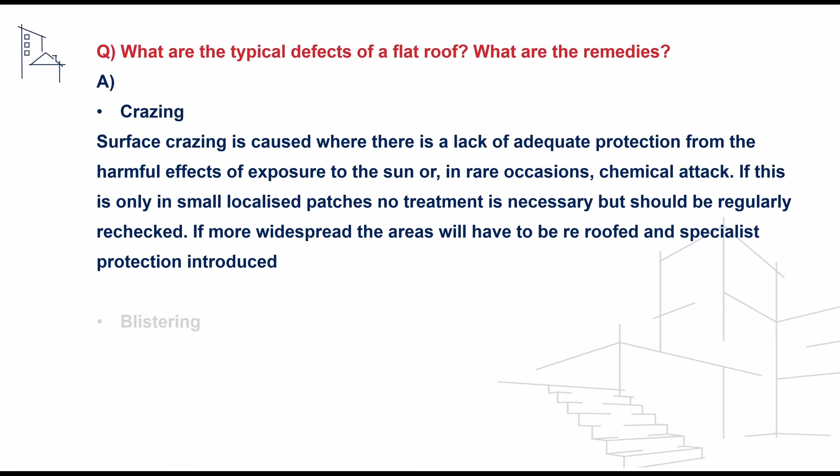To address this question, first of all we can mention a typical defect with a flat roof is crazing. Surface crazing is caused where there is a lack of adequate protection from the harmful effects of exposure to the sun, or in rare conditions a chemical attack. If this is only in a small localized patch, then no treatment is necessary but should be regularly rechecked. However, if it's more widespread, the areas will have to be re-roofed and specialist protection introduced.

Another question we may be asked is: what other sorts of cracks would you expect to see on a brick building and what may have caused them?

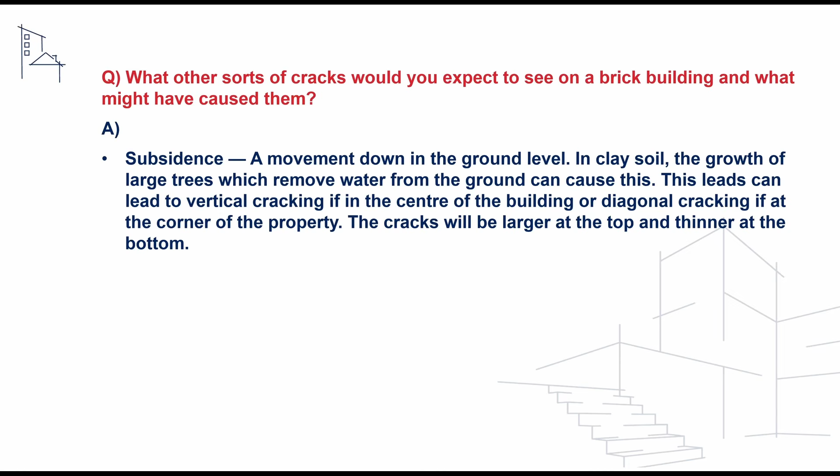To address this, first of all we could reference subsidence, and this is a movement down in the ground level. This can occur in clay soil where the growth of large trees which remove water from the ground can cause this, and this can lead to vertical cracking if in the centre of a building or diagonal cracking if at the corner of a property, and the cracks will be larger at the top and thinner at the bottom.

We could also reference ground heave, which is an upward movement in the ground level. In clay soil, the removal of a tree will often increase the moisture content of the soil, and this could cause the ground to swell. This leads to vertical cracking, again if at the centre of the building, or diagonal cracking if at the corner of the property.

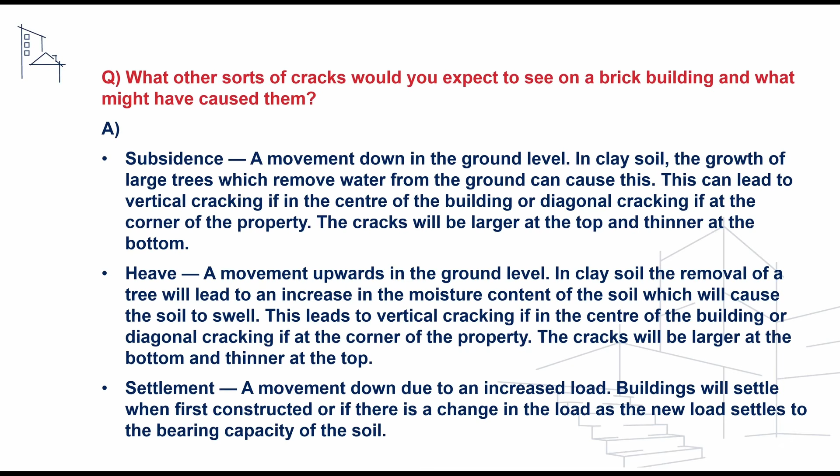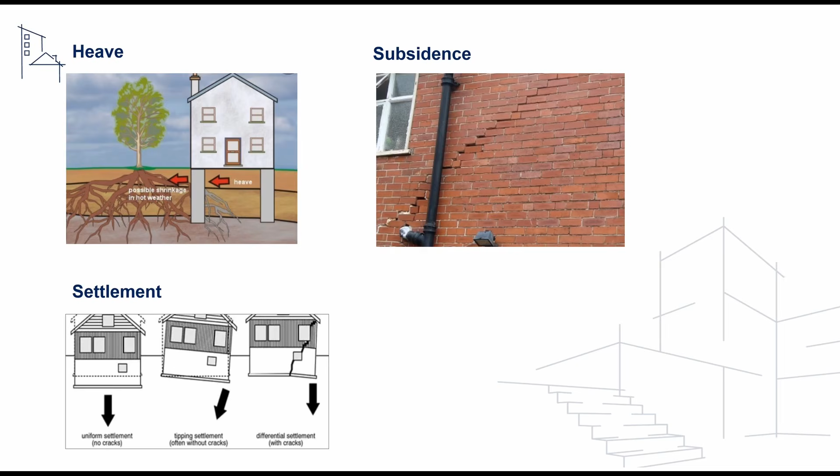We could also reference settlement, which is a downward movement due to an increased load of a building. Typically buildings will settle when first constructed, or if there is a change in the load as a new load settles to the bearing capacity of the soil. These are some diagrams showing the different types of causation of cracks within buildings, including the heave, subsidence and settlement.

Another question we may be asked under the building pathology competency is checking our understanding of the term damp or dampness in buildings. To address this we can say that a building is only considered to be damp if the moisture becomes visible through the discoloration and staining of finishes, or causes growth of mould, sulfate attack, frost damage, or even drips and puddles are prevalent in the property.

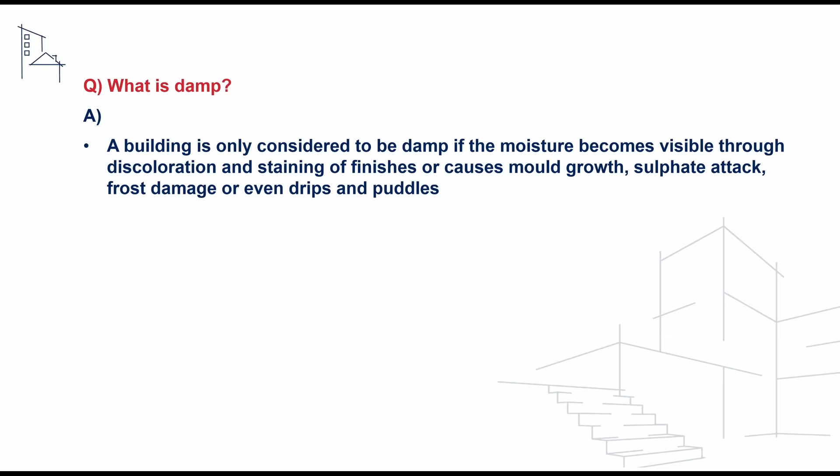A follow-on question we may be asked in relation to damp is how could you test for dampness within properties? To address this, we could say that we would use a Protimeter, moisture reader, or speedy carbide meter, and this can be used to establish the moisture content of walls and the level of damp that's prevalent within the property.

We may also be asked a question on how to identify rising damp, what are the causes, and how would we look to remedy rising damp. To address this, we could say that rising damp causes high tide marks, peeling and blistering of wall finishes, musty smell. It can also cause rotting timber, and use of a speedy carbide meter can be used to measure moisture readings within the walls of a property, and the readings with the moisture meter will result in high surface readings, often with slight decline, finishing with a sudden cut-off.

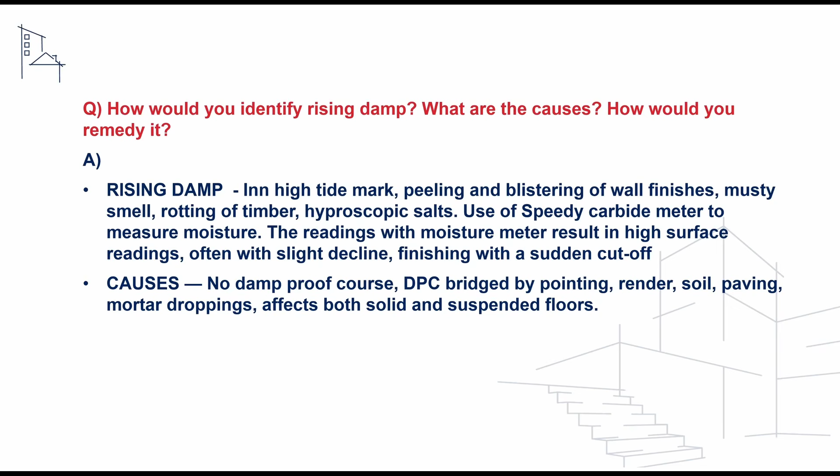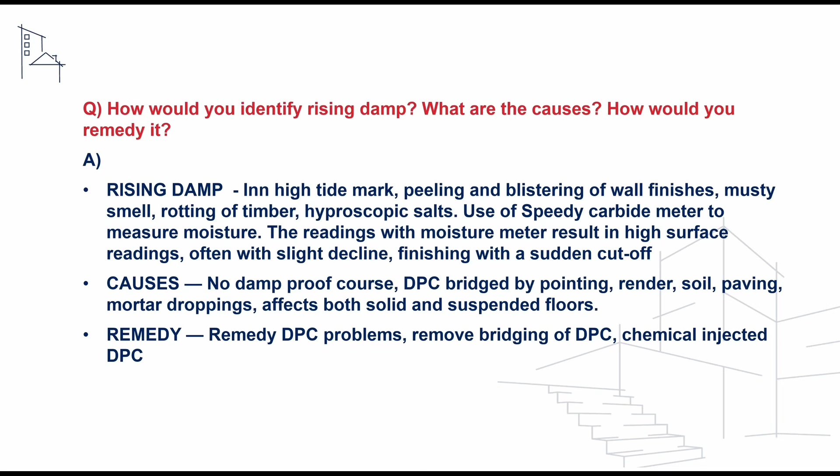The causes of rising damp can include where there is no damp-proof course in place, or there may be damp-proof course bridging caused by pointing, render, soil, or paving, or mortar droppings. The remedy for rising damp can include remedy to any damp-proof course issues. This can include removal of any sources of bridging, and also a chemically injected DPC.

We may also be asked a question on what type of soil is susceptible to ground heave and what are the potential or possible causes. To address this, we can say that cohesive soils such as clay are often susceptible to ground heave. Possible causes could include the removal of trees, a change in the water table, leaking drains, or inadequate foundations that are built within the movement zones.

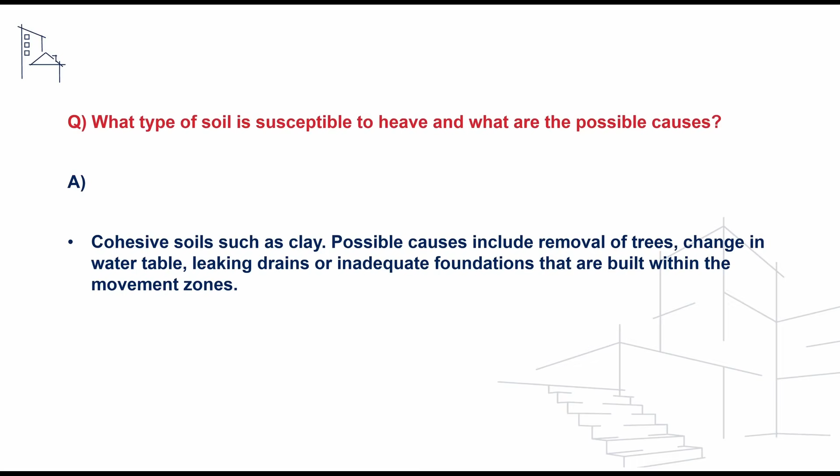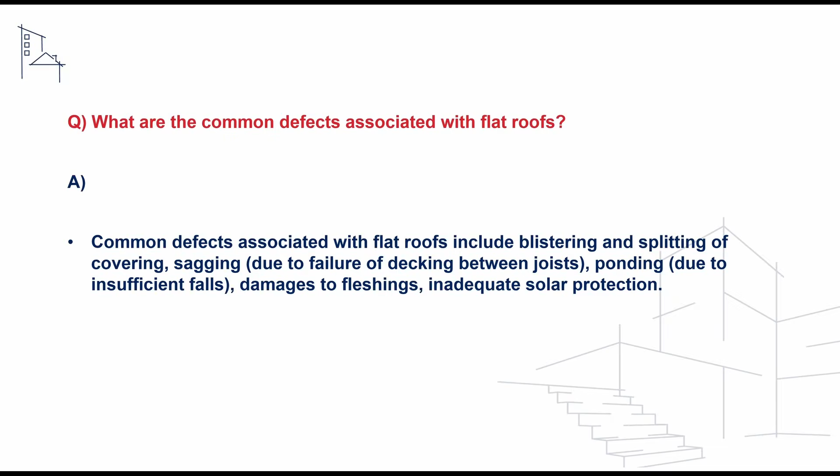The last question we'll take a look at under building pathology is what are the common defects associated with flat roofs. To address this, we can say that common defects include blistering or splitting of coverings, sagging due to failure of decking between joists, ponding due to insufficient falls, and damages to flashings and inadequate solar protection.

We'll now take a look at some questions that are focused on the inspection competency.

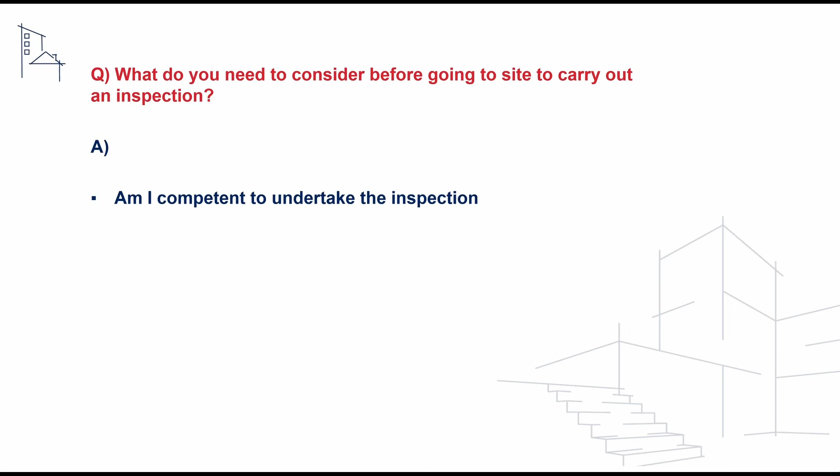The first question we'll take a look at under the inspection competency is what do you need to consider before going to site to carry out an inspection? First of all, we can reference the consideration of whether we are competent to undertake the inspection. We also need to ask ourselves, are we properly insured? Whether a formal agreement has been signed by the client and is in place prior to undertaking the inspection. What are the particular risks that we need to consider in regards to health and safety, working at height, any presence of asbestos, for example.

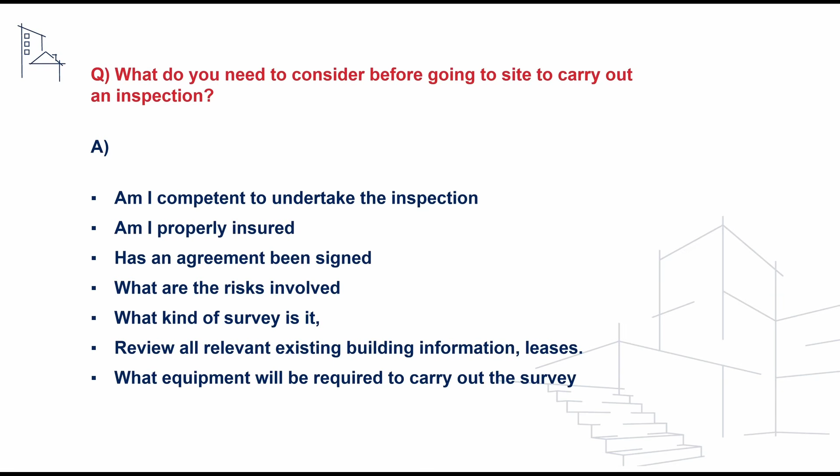We'd also need to consider what kind of survey it is that we are undertaking, and also review all relevant information that relates to the existing building information, any leases and transaction prices. Finally, which type of equipment we would need to take along in order to carry out the survey.

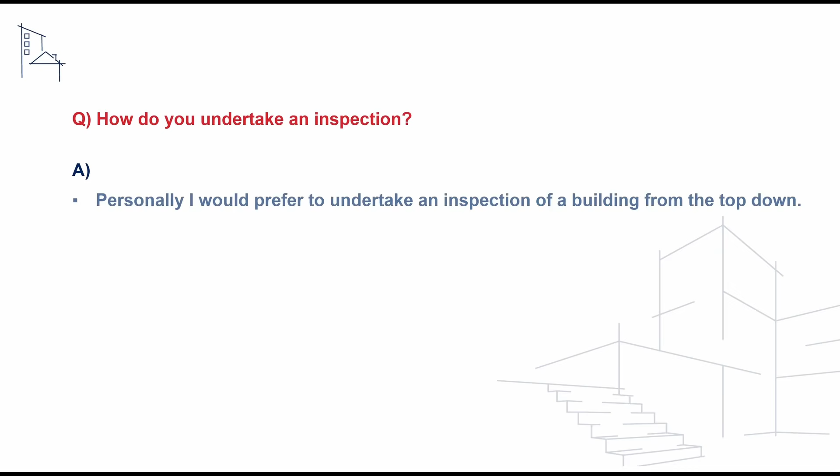We may also be asked a follow-up question to this, checking our approach and understanding of how we would go about undertaking an inspection of a property. To address this, we could say that my own personal preference when undertaking inspections has been to undertake these from the top floor of the property, working my way down. In the past, I've normally walked around the building externally a couple of times, first of all to get my bearings and get an initial understanding, paying close attention to the indication of age, the form of construction, and any extensions and external defects.

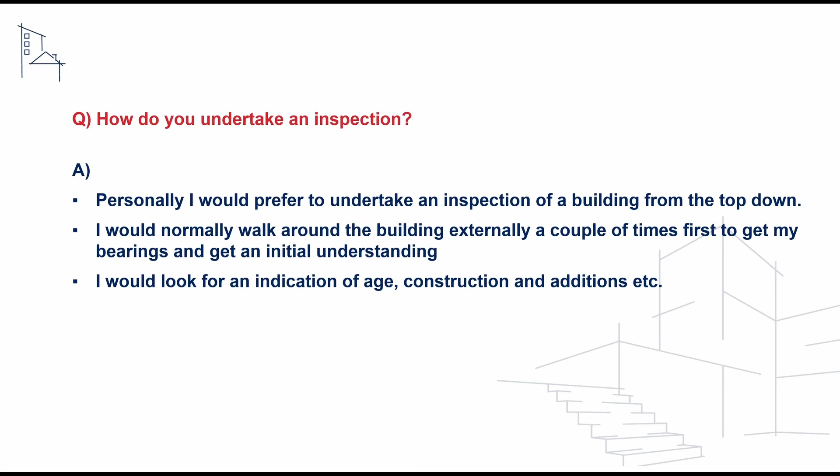I then started the inspection externally by inspecting each elevation in turn, looking at the roof, elevations, windows, doors, drainage, and any rainwater goods. I would then typically move inside and again start from the roof space and move down through the various floors of the property.

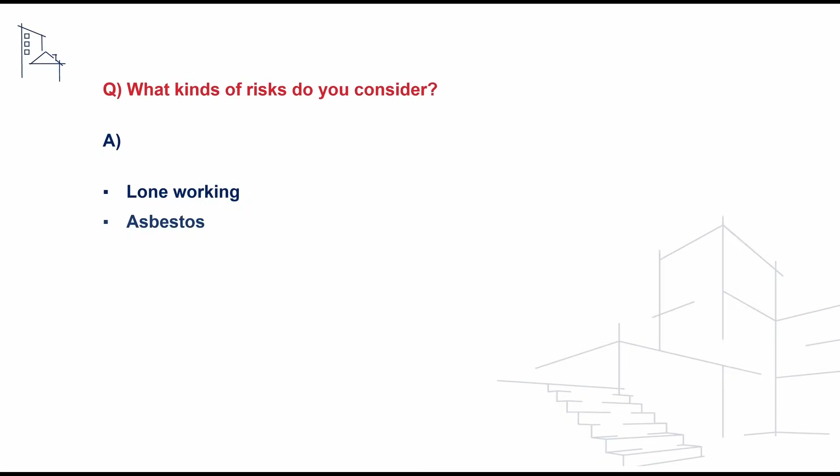We may also receive a question from the assessors asking what kind of risks we would need to consider, and to address this we could first of all reference the risk of lone working, the presence of any asbestos, our ability to access roof spaces at height, our ability to access roofs and roof spaces, and in particular the risks associated with working at height. We'd also need to consider any hazards associated with the derelict nature of the property or the empty property, and also any risks associated with working within confined spaces.

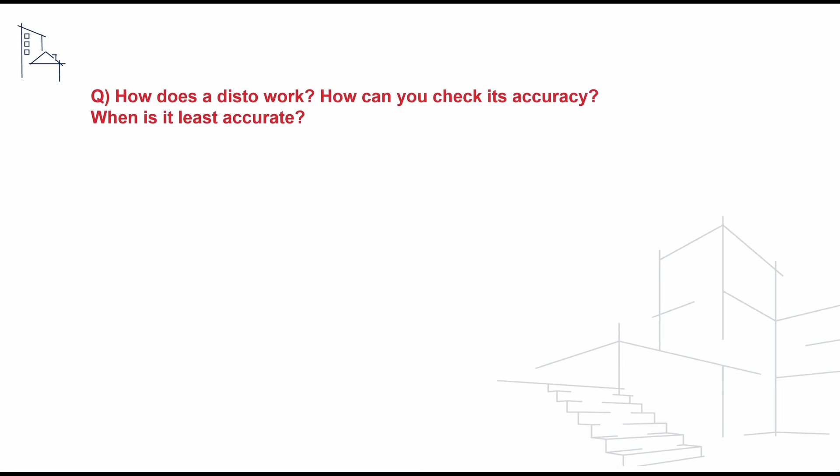We may also get a question from the assessors checking our understanding of the equipment associated with undertaking property inspections. In this example, we may get asked a question on our understanding of how a disto laser measure works and how we would go about checking whether this is accurate. To address this, we could first of all say that the disto sends out a laser beam and measures the time taken for it to reflect, which then generates a distance.

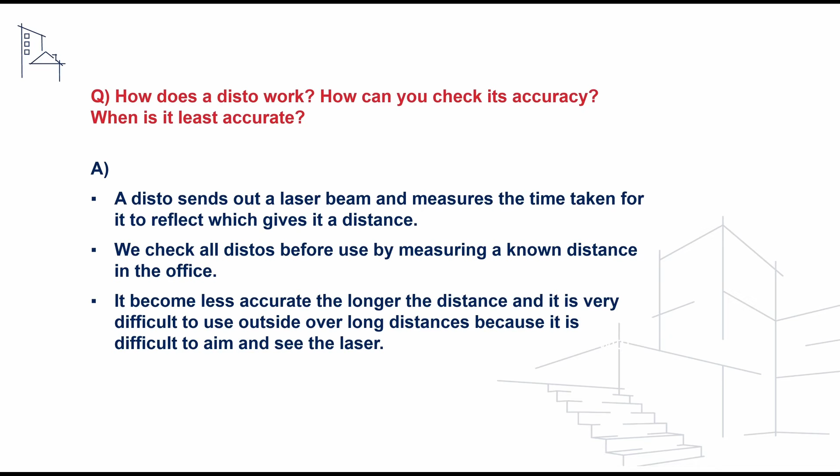We could check this by first using a known measured distance within the office prior to undertaking the inspection. We'd also need to say that it becomes less accurate the longer the distance, and reference that it's particularly difficult to use this piece of equipment outside over long distances because it is difficult to aim and see the laser.

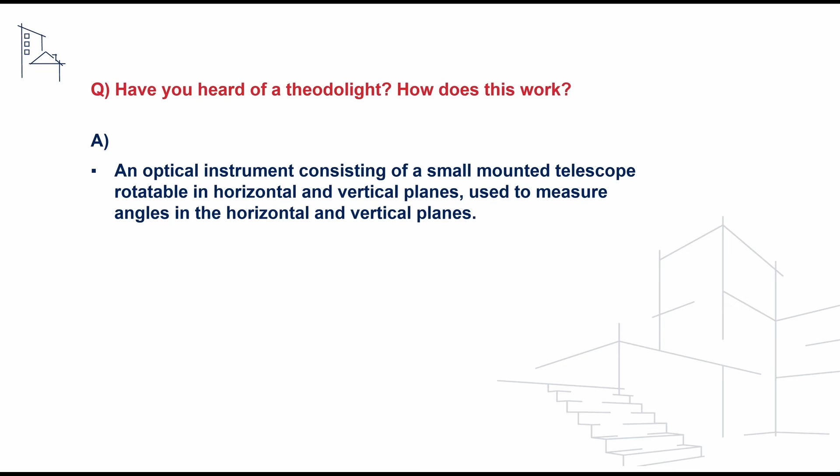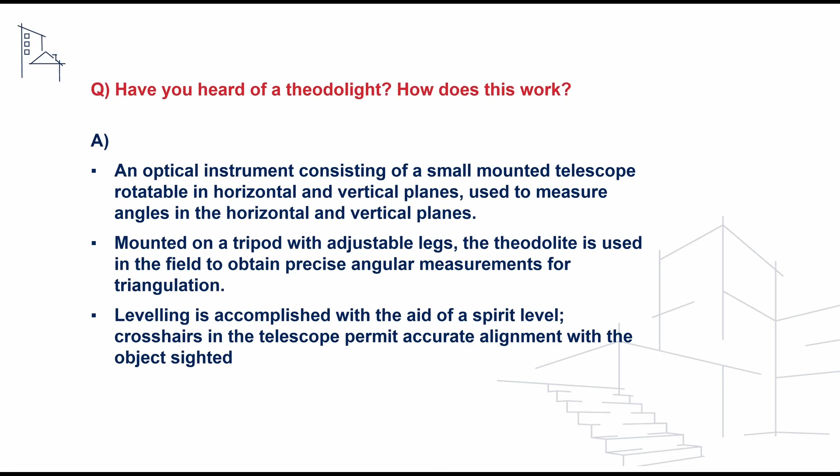The next question is, have you heard of a theodolite and how does it work? We could say that the theodolite is an optical instrument consisting of a small mounted telescope which is rotatable in both horizontal and vertical planes, used to measure angles in both instances. The telescope is mounted on a tripod with adjustable legs, and the theodolite is used in the field to obtain precise angular measurements for triangulation. Levelling can also be accomplished with the aid of a spirit level, using crosshairs in the telescope, permitting accurate alignment with the object being sighted.

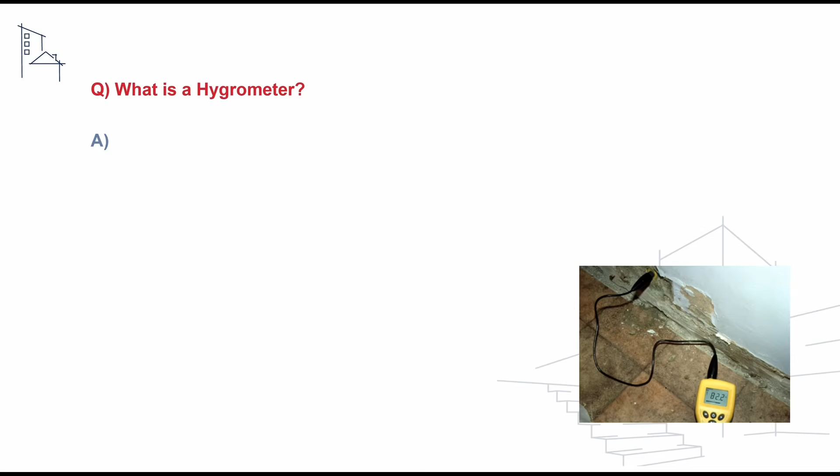We may also get a question on our understanding of a hygrometer. To address this we could say that a hygrometer is used to measure the amount of humidity in the air and to diagnose condensation. An electrical resistance meter provides the temperature and relative humidity. Older equipment also includes the whirling hygrometer.

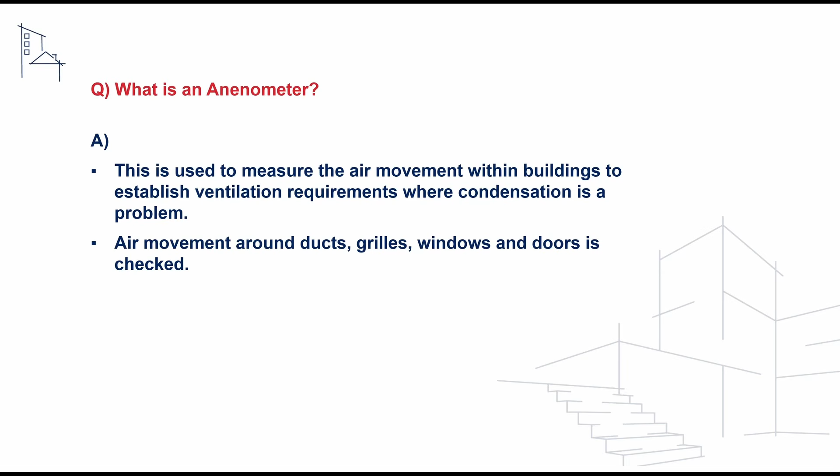We may also be asked a question on our understanding of an anemometer. This is used to measure the air movement within buildings to establish ventilation requirements where condensation has been known to be an issue, measuring air movement around ducts, grilles, windows and doors, where we could use this piece of equipment to check these areas. Wind speeds to external faces of buildings can also be checked to establish high levels of exposure to driving rain due to the location of a property.

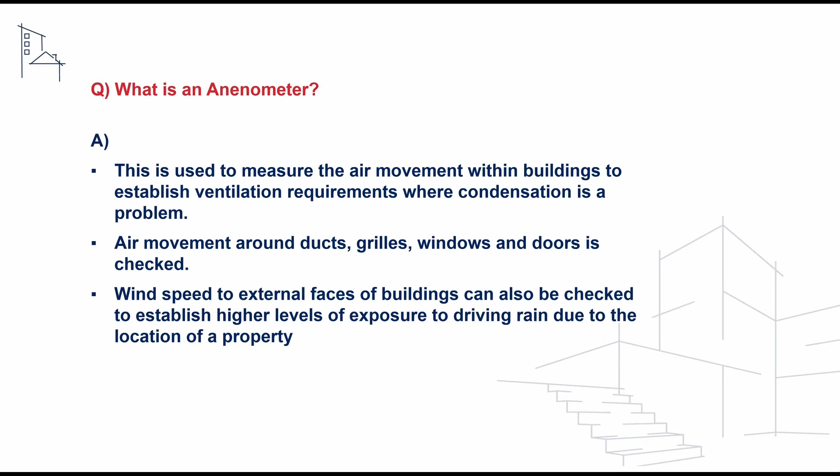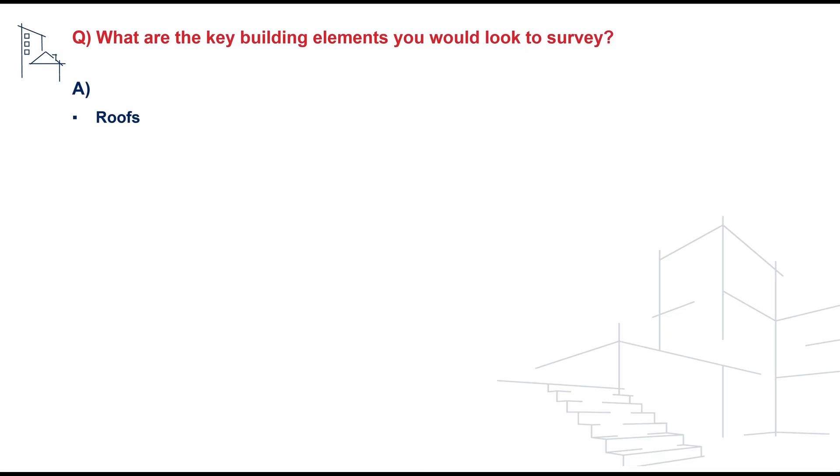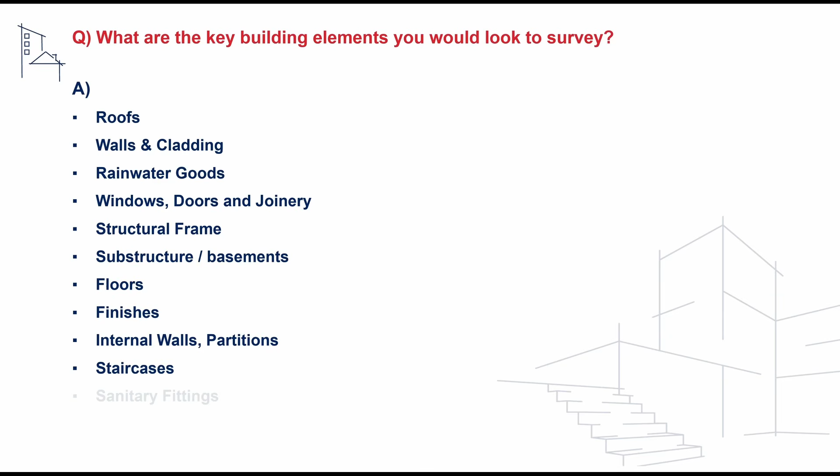The next question is, what are the key building elements you would typically look to inspect and survey? We would normally pay close attention to roofs, walls and cladding, any rainwater goods, windows, doors and joinery, the structural frame of the building, the substructure and basements, the ground floors and raised floors, any finishes, internal walls and partitions, the staircases of the property, any sanitary fittings, building services, and finally any outbuildings.

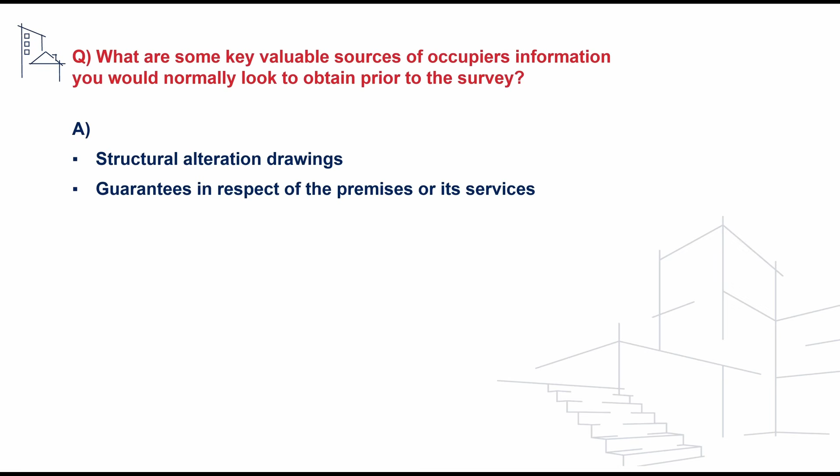We may also be asked a question from the assessors on what are some of the key valuable sources of occupiers information you would normally look to obtain prior to the survey of a property. We would reference any structural alteration drawings, any guarantees in respect of the premises or its services, any flooding or boundary documentation.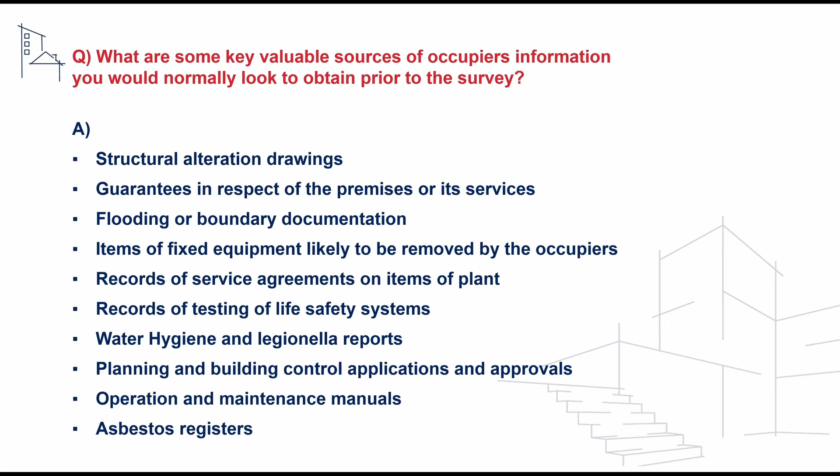Documentation on items of fixed equipment likely to be removed by the occupiers, records of service agreements on items of plant, any records of testing of life safety systems, water hygiene and Legionella reports, planning and building control applications and approvals, any documentation on the operation and maintenance manuals, asbestos registers, and any documentation on radon tests and high alumina cement tests.

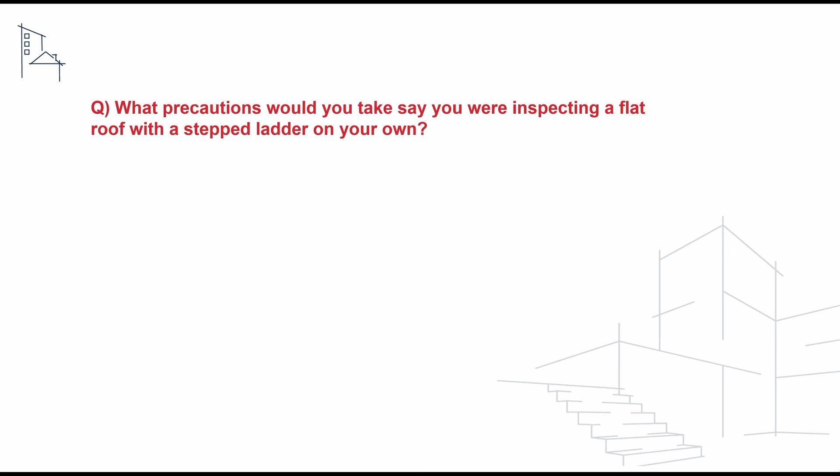We may also be asked a more specific question on what precautions we would take if we were to inspect a flat roof by using a stepped ladder whilst lone working. We would first prepare risk and method statements before undertaking the survey. We would also consider the height of the roof, and if it was more than a single storey in height, I would arrange alternative access.

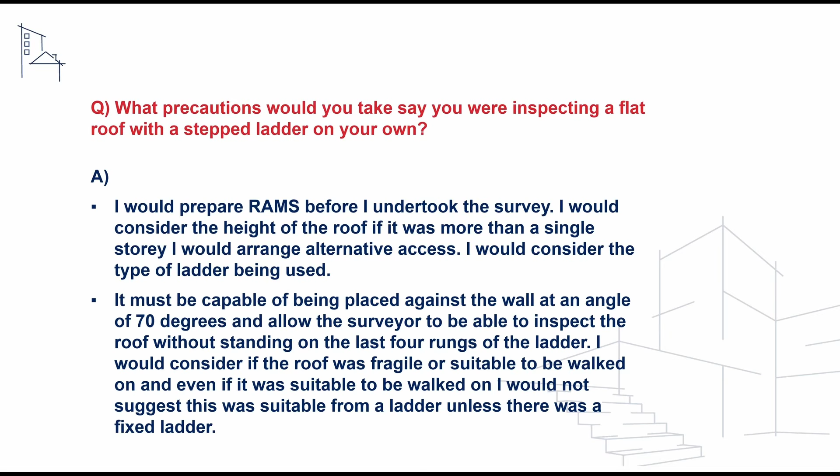We could also say that we would consider the type of ladder being used and state that it must be capable of being placed against a wall at an angle of 70 degrees, allowing the surveyor to undertake the inspection of the roof without standing on the last 4 rungs of the ladder. We could also reference that we would consider if the roof was fragile or suitable to be walked on, and even if it was suitable to be walked on, I would not suggest that this was appropriate from a ladder unless there was a fixed ladder in place.

Another follow-on question relating to this area is, if you were asked to inspect a flat roof, talk us through the inspection process you would undertake. To address this, we could firstly say that we would gather historical information about the building and details of any current or previous issues with the roof, making arrangements for access and preparing any necessary risk and method statements.

We would first identify the age of the roof, establish any previous repairs undertaken, and establish when the roof is known to be defective. For example, when does it leak? Is any ponding water present on the roof? What's the use of the room from the occupied space below, and the use of any balconies or terraces? We'd also consider the access arrangements, and secondly carry out a visual inspection during or after a period of rainfall.

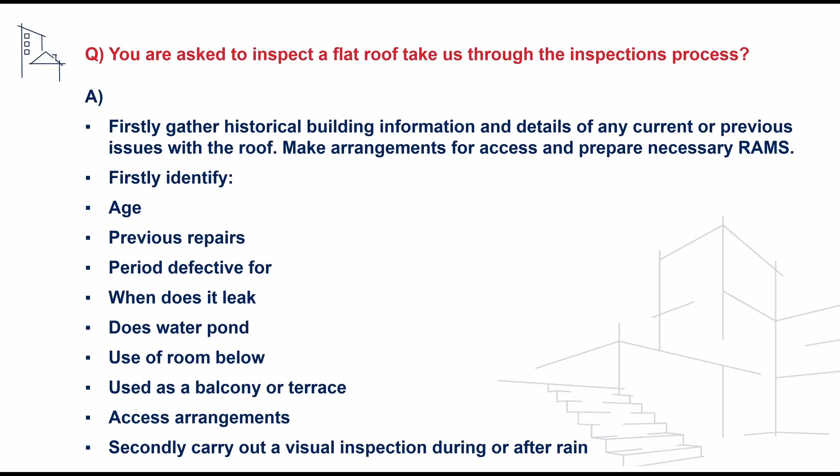We may also be asked about our awareness of any RICS documentation that provides guidance on undertaking safe inspections. To address this, we could reference the Property Inspection Technical Guidance for completing single surveys, the COVID-19 Guide to Surveying Services, and finally the RICS Guide to Surveying Safely. We'll now look at questions focusing on the construction technology competency.

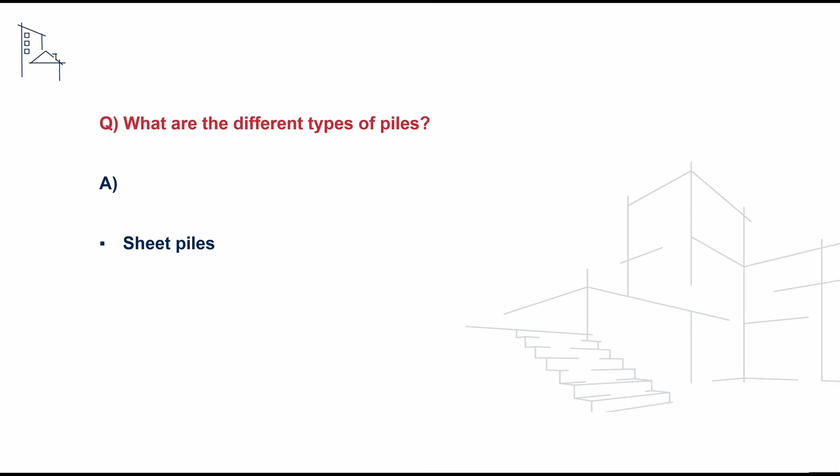Under this competency we may be asked about our knowledge of the different types of pile foundation methods. To address this we can reference sheet piles, secant piles, bored piles and precast piles.

We may then be asked a follow-on question on our knowledge of how bored piles work. To address this we could say that an auger is used to excavate the soil, and concrete is then poured in along with any reinforcement that's required.

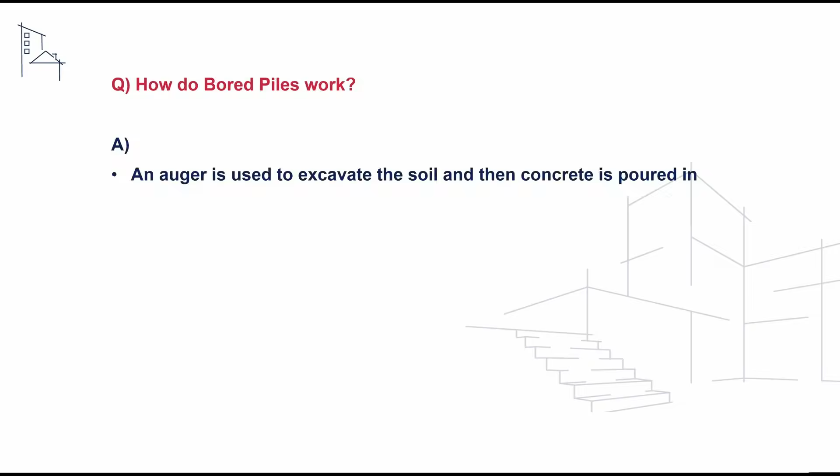Another question we may be asked is what advice would you give a client who wanted to know the technical disadvantages of steel frame construction? To address this we could say that we would make the client aware that the steel frame requires fire protection, and individual parts may need replacing over time. The price of steel is incredibly volatile and may create risks within the development. It also requires experienced, skilled builders, resulting in additional cost, and these resources may be hard to acquire.

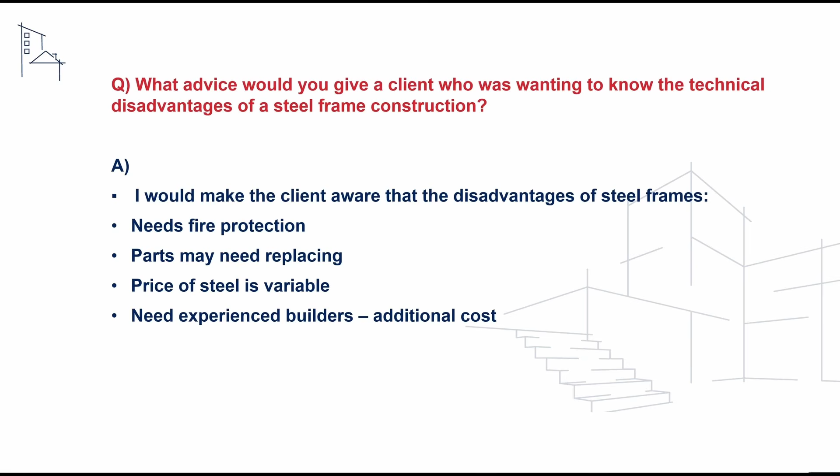We may also be asked about our understanding of the term buildability. To address this we can say that buildability refers to the practicality and ease of construction associated with the design, and the main contractor's expertise around buildability should help to realise improvements to both ease the construction and realise the efficiencies available from the design.

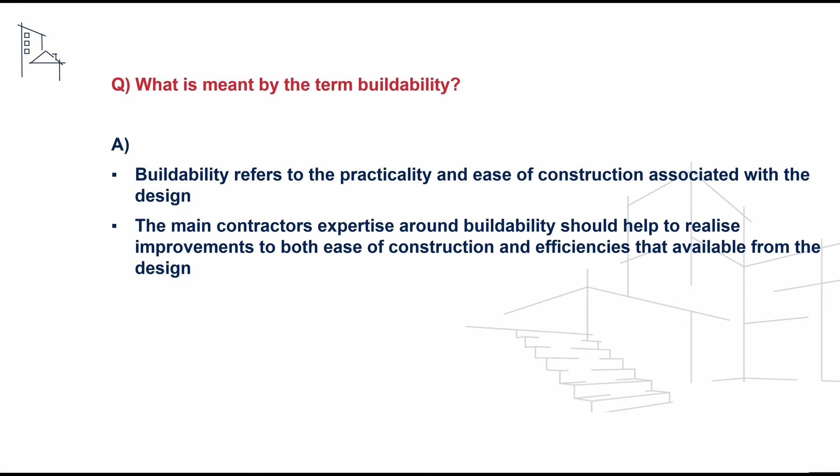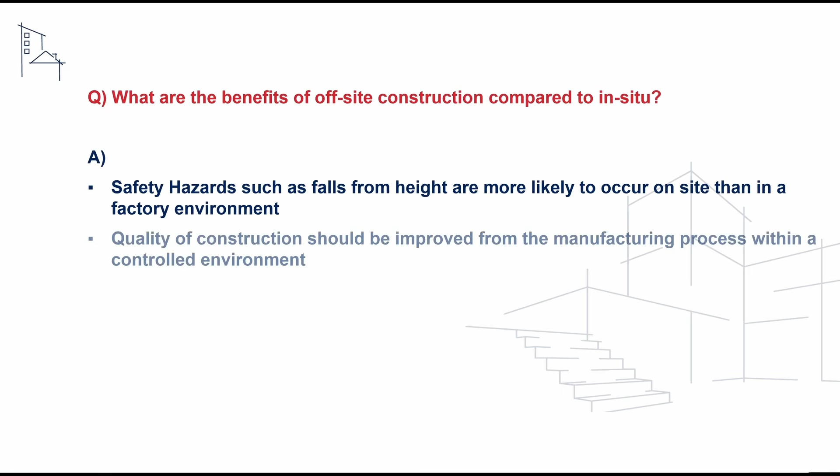The next question is: what are the benefits of off-site construction compared to in situ? To address this we can say that safety hazards such as falls from height are more likely to occur on site than in a factory environment. Quality of construction should be improved from the manufacturing process within a controlled environment. Sustainability can be improved through reduced waste and power generated from renewable sources. Speed of delivery can be increased as off-site work can be undertaken in parallel to works on-site.

The next competency is legal and regulatory compliance. The first question under this competency is a high-level question checking our understanding of the building regulations. To address this, we can say that the building regulations are made under powers provided in the Building Act 1984 and apply in England and Wales. They exist to ensure the health and safety of people in and around all types of buildings, whether domestic, commercial or industrial, and they also provide for energy conservation and cover access to and use of buildings.

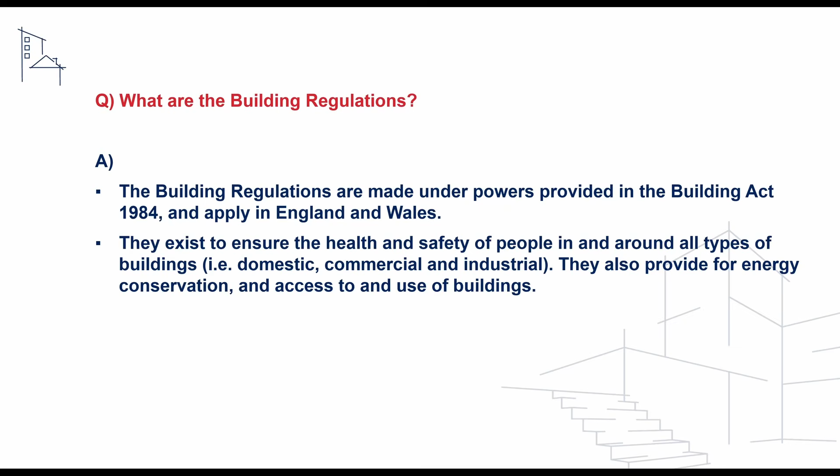A follow-on question we may be asked is what is deemed to constitute building work under the Act? To address this we can say that building work is defined in Regulation 3 of the Building Regulations, and the definition means the following types of project amount to building work: the erection or extension of a building; the installation or extension of a service or fitting controlled under the regulations; an alteration project involving work which will temporarily or permanently affect the ongoing compliance of the building, service or fitting with requirements relating to structure, fire, or access to and use of buildings; the insertion of insulation into a cavity wall; and the underpinning of foundations of a building.

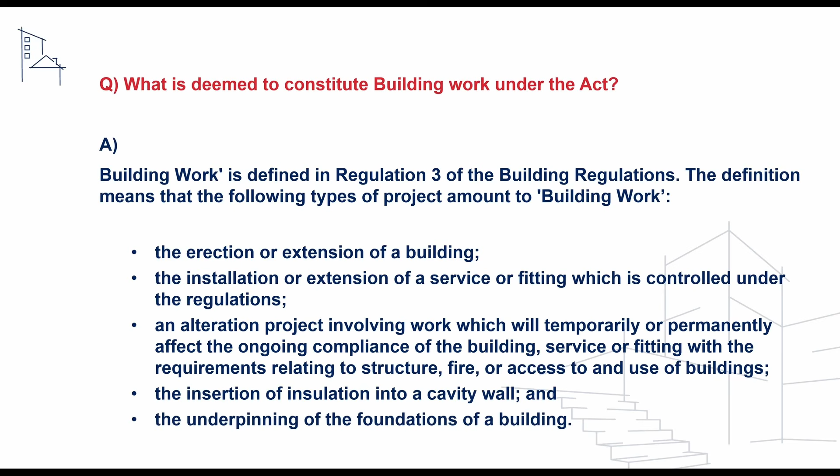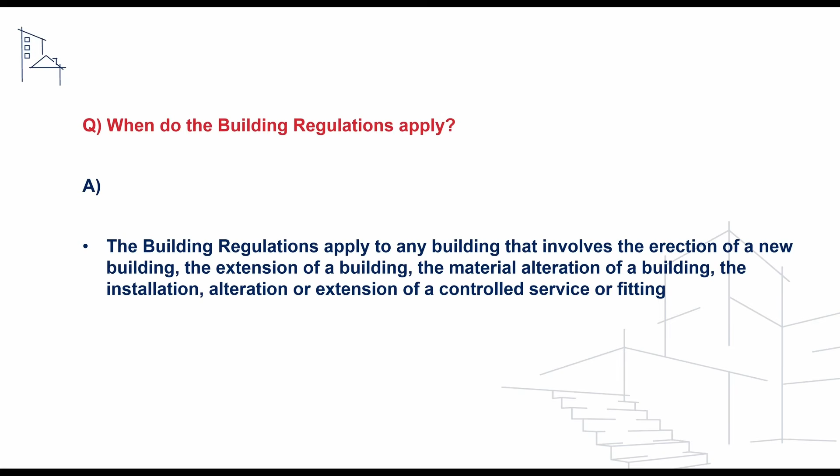We may receive a follow-on question checking our understanding of when the building regulations apply. To address this we can say that the building regulations apply to any building that involves the erection of a new building, the extension of a building, the material alteration of an existing building, or the installation, alteration or extension of a controlled service or fitting.

The next question checks our understanding of the approved documents under the Act. To address this we can say that these provide practical guidance on methods to comply with the functional requirements of the building regulations, contained in a series of 14 approved documents.

Another question we may be asked is our understanding of the different approved documents. We could reference any of the approved documentation, for example things relating to structural matters, fire safety, ventilation, hygiene, conservation of fuel and power, glazing safety, and electrical safety.

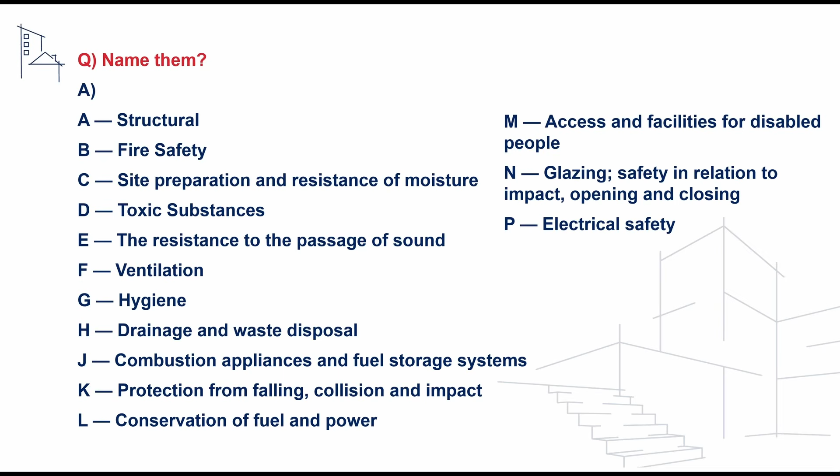The next question is: what is the difference between an approved inspector versus building control?

Approved inspectors are businesses which work in the private sector as an alternative to local authority building control, whereas an approved inspector will be registered with the Construction Industry Council to advise and guide clients about the building regulations.

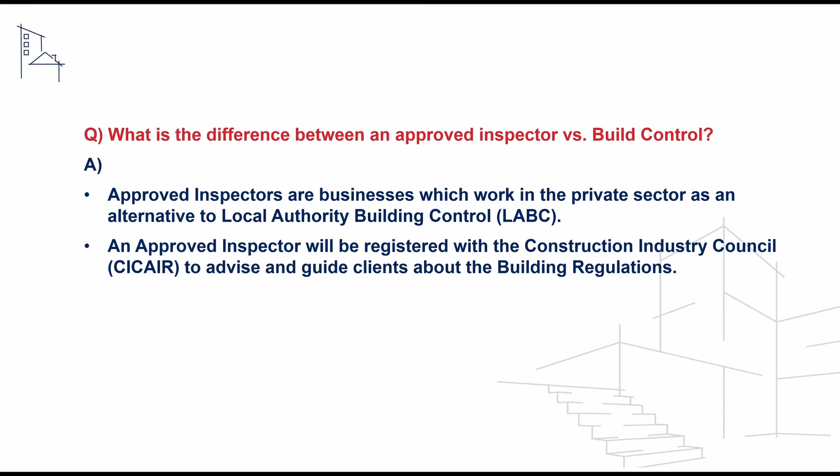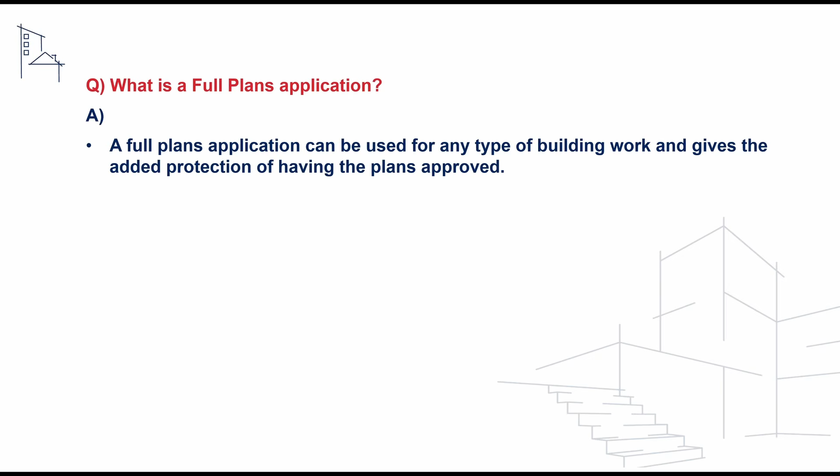The next question is what is a full plans application? A full plans application can be used for any type of building work and gives the added protection of having the plans approved. The full plans application is deposited with the local authority, usually together with 25% of the full charge payable.

With agreement, work may be started after 2 working days. However, before the plans are checked and approved, it is at the client's own risk, and you will be invoiced for the remaining part of the charge after work starts.

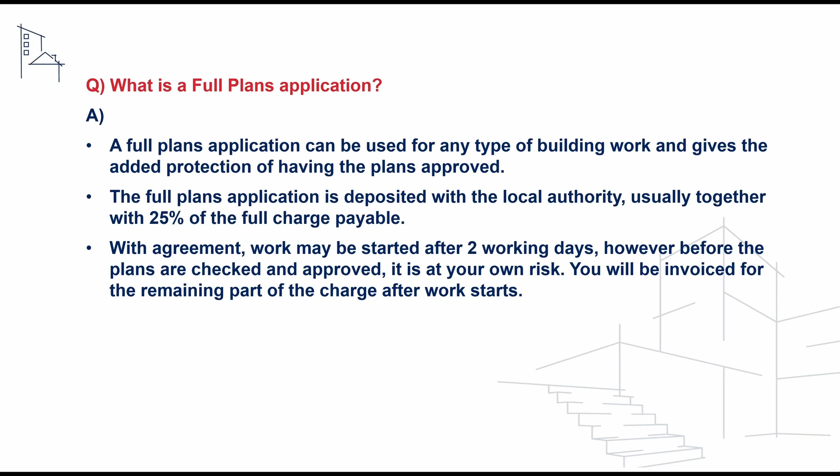You must inform the local authority at certain stages of the work so that they can carry out inspections to confirm that the building work is in accordance with the approved plans. On satisfactory completion of the building work, you'll be given a completion certificate.

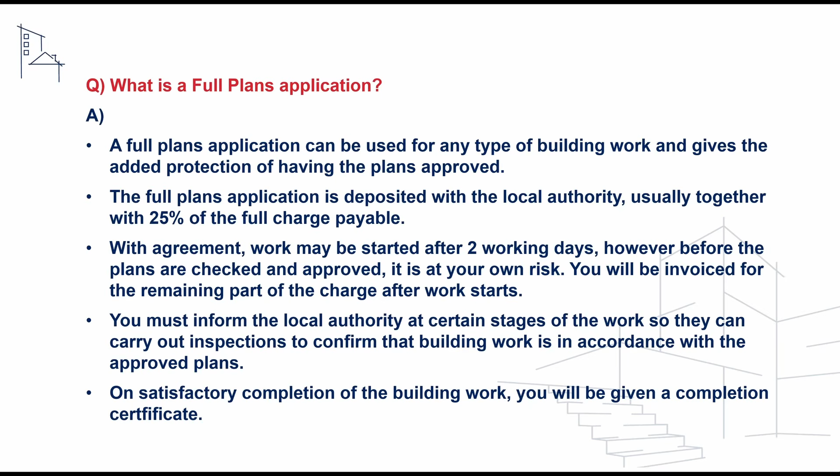The next question is what is a building notice application? A building notice cannot be used where the building is a workplace, as identified in the Regulatory Reform (Fire Safety) Order 2005.

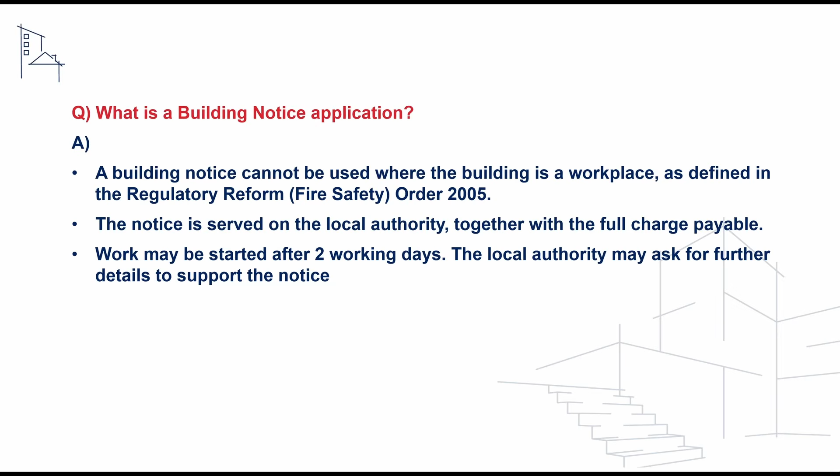The notice is served on the local authority together with a full charge payable, and work may be started after 2 working days. The local authority may ask for further details to support the notice, and you must inform the local authority at certain stages of the work so they can inspect the works ongoing.

As no plans have been approved, it is important that these notifications are given, and on satisfactory completion of the building work, you'll then be given a completion certificate.

The next competency we'll take a look at is analysis and appraisal. The first question is a level 1 question, checking our understanding of a development appraisal. This is an objective financial viability test of the ability...

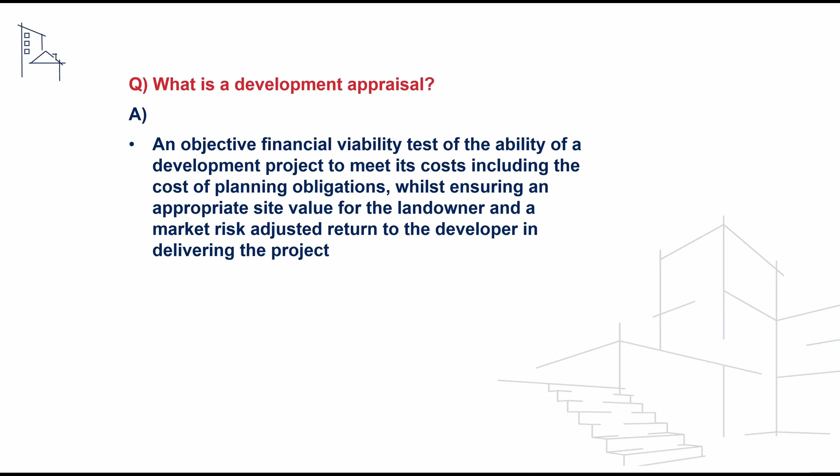This is an objective financial viability test of the ability of a development project to meet its costs, including the cost of planning obligations, whilst ensuring an appropriate site value for the landowner and a market risk adjusted return to the developer in delivering the project.

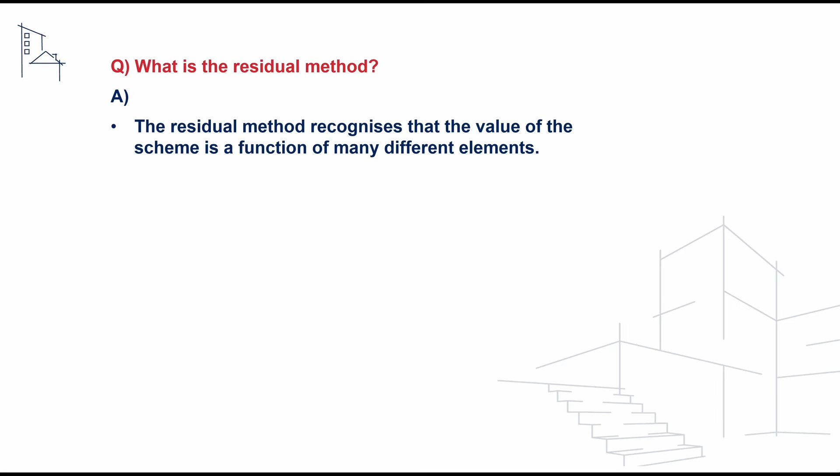We may also be asked the follow-on question, checking our understanding of the residual valuation method. The residual method recognises that the value of the scheme is a function of many different elements.

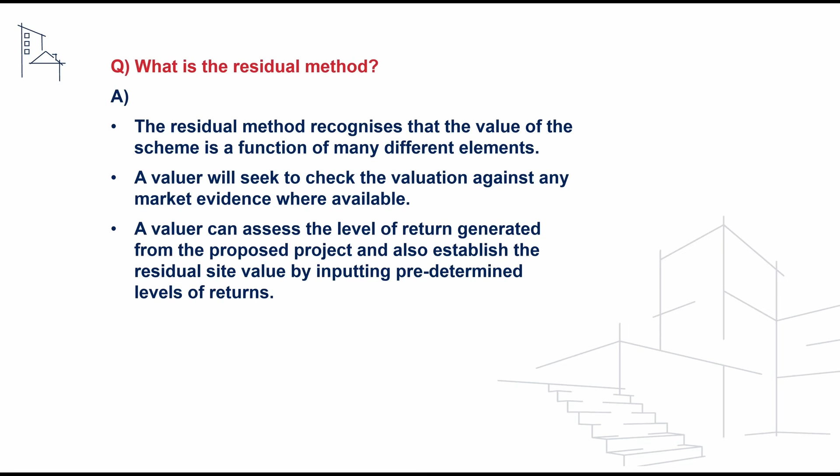A valuer will seek to check the valuation against any market evidence where available, and a valuer can assess the level of return generated from the proposed project and also establish the residual site value by inputting predetermined levels of returns.

Where a planning obligation reduces the site value to the landowner and return to the developer below an appropriate level, land will not be released or development will not take place.

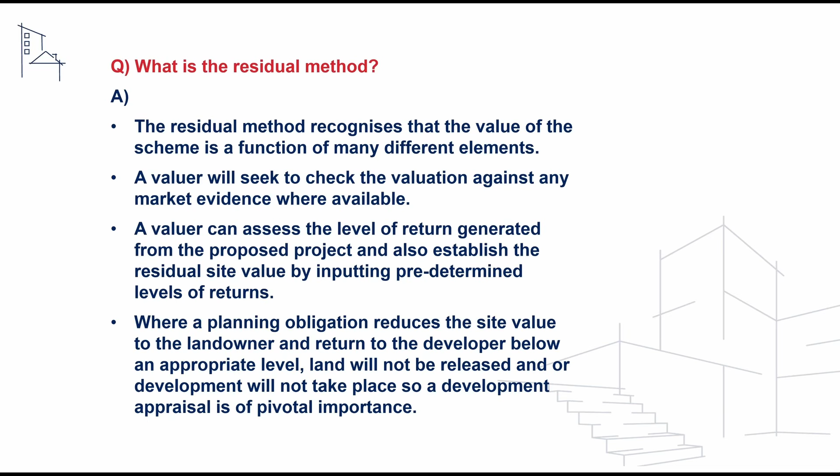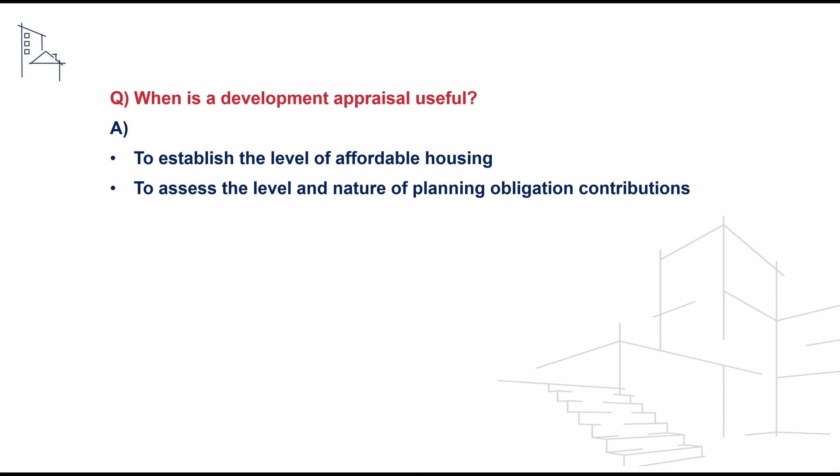We may also be asked a question checking our understanding of when a development appraisal is useful. This is used to establish the level of affordable housing, to assess the level and nature of planning obligation contributions, and when reviewing land uses.

A follow-on question we may be asked is what are the key stages of the residual method? We would establish the development or redevelopment potential within the market for that parcel of real estate in a particular location.

We would also assess the value of the completed scheme and assess all the development costs, including an amount for normal profit, allowing for risks and timings of the project, and for the finance costs and interest charges on any capital needed to fund the whole of the scheme.

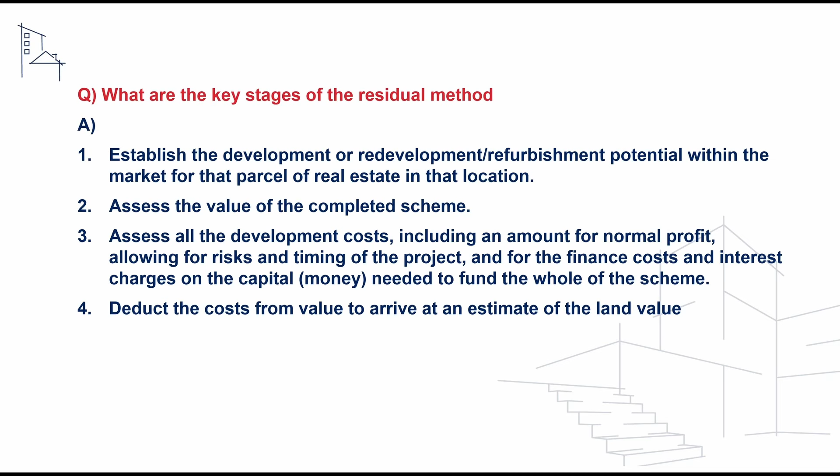We would then deduct the cost from value to arrive at an estimated land value and determine whether we would proceed with the development. Another follow-on question we may be asked is what is a sensitivity analysis?

This is where you recalculate the appraisal with different assumptions on inputs, for example an increase in build cost or a decrease in gross development value, and seeing what effect this has on the overall profit measures and whether it's still worth proceeding with the development.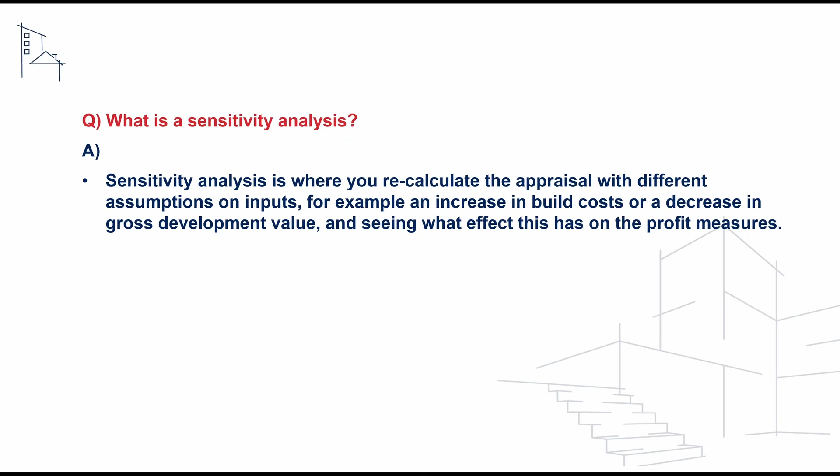The next question is how would you calculate the sum of money available to purchase a piece of land? The sum of money available for the purchase of land can be calculated from the value of the completed development, or the GDV, minus the cost of the development process, including profit.

The complexity in such assessments lies in the calculation of inflation, finance terms, interest and cash flow against a programme timeframe.

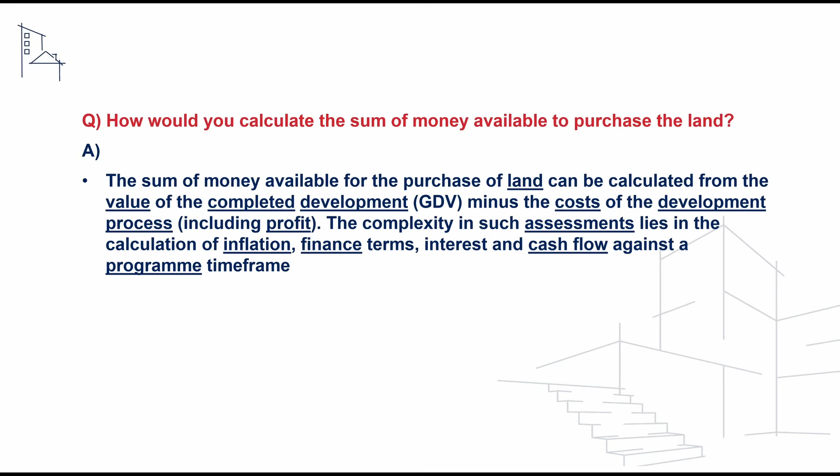And the last question we'll take a look at under this competency is what are the key components of a site acquisition strategy?

To address this, we would firstly instruct land agents to identify new sites or investigate the possibility of acquiring existing sites for future development.

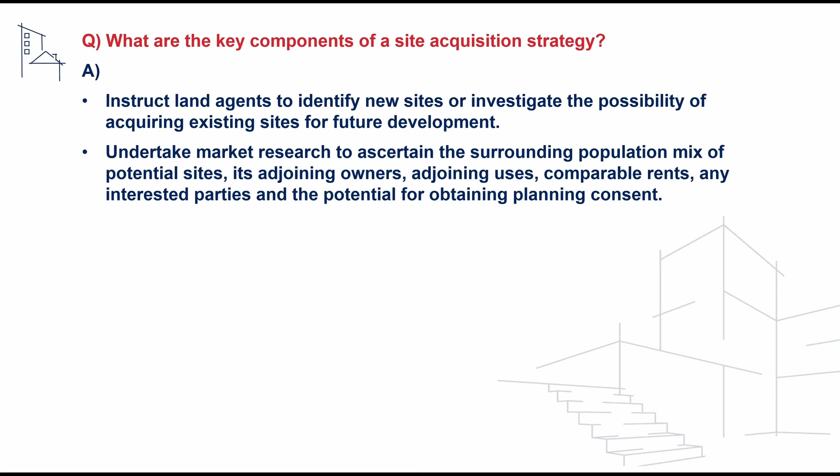We would then undertake market research to ascertain the surrounding population mix of potential sites, its adjoining owners, adjoining uses, comparable rents, any interested parties, and the potential for obtaining planning consent.

We would then carry out a development appraisal option analysis to select the most suitable site for development and select the site that best meets the development criteria.

We would then obtain the developer's approval to engage in negotiation with the existing landowners and commence negotiations with the landowner regarding purchase. We would then acquire or take out an option to purchase the land or existing buildings for development, and then confirm the development agreement with the landowners, investors and various stakeholders.

We'll now take a look at some questions focusing on the measurement of land and property competency. The first question we'll take a look at under this competency is, when measuring, what factors are you governed by?

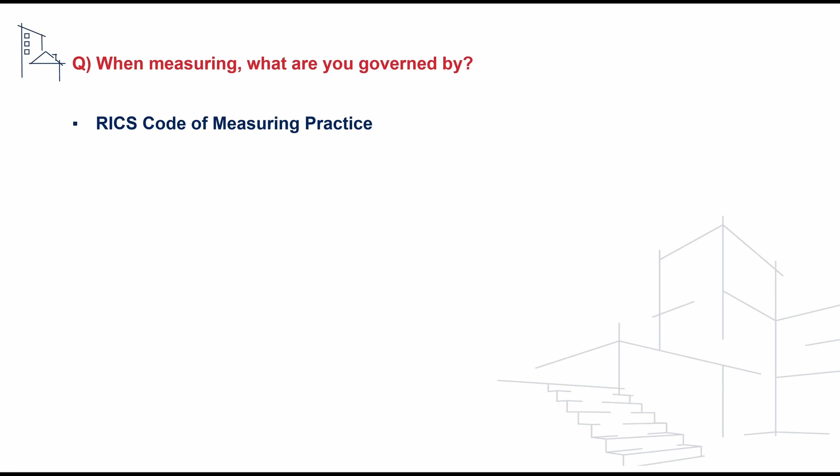To address this question, first of all we can reference that we are governed by the RICS Code of Measuring Practice, and we could also say that the purpose of the code is to provide succinct, precise definitions to permit the accurate measurement of buildings and land.

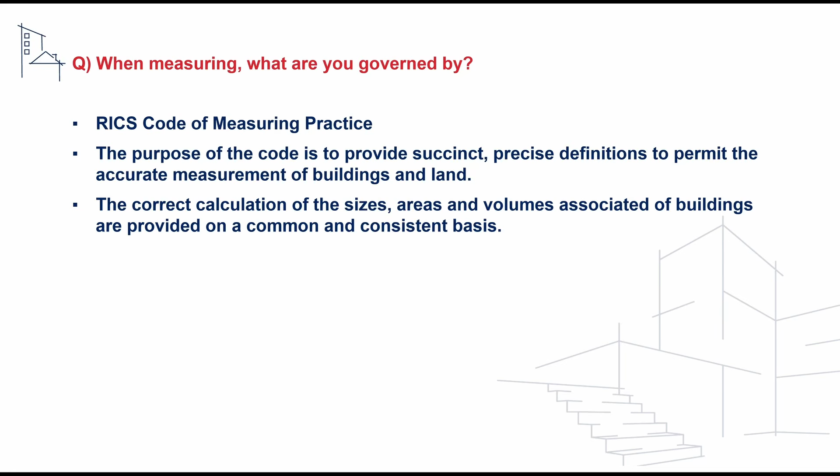This also allows the calculation of the correct sizes, areas and volumes associated with buildings, and provides a common and consistent basis on which to work.

This is there to provide support to surveyors who are undertaking property inspections, either for the purposes of valuation, management, conveyancing, planning, taxation, sales and letting, and it's there to provide a common framework to measure buildings by.

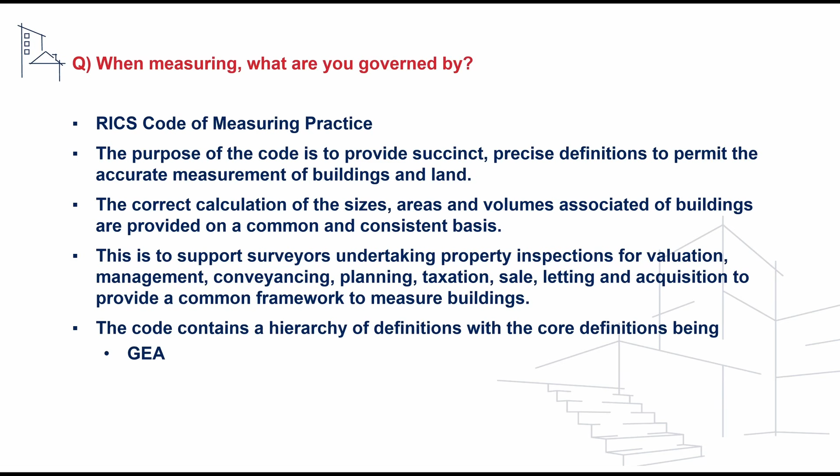The code also contains a hierarchy of definitions, with the core definitions being the gross external area, gross internal area, and the net internal area.

We may also receive some follow-on questions to this, asking our understanding of the various definitions contained within the Code of Measuring Practice, the first being the definition of the gross external area.

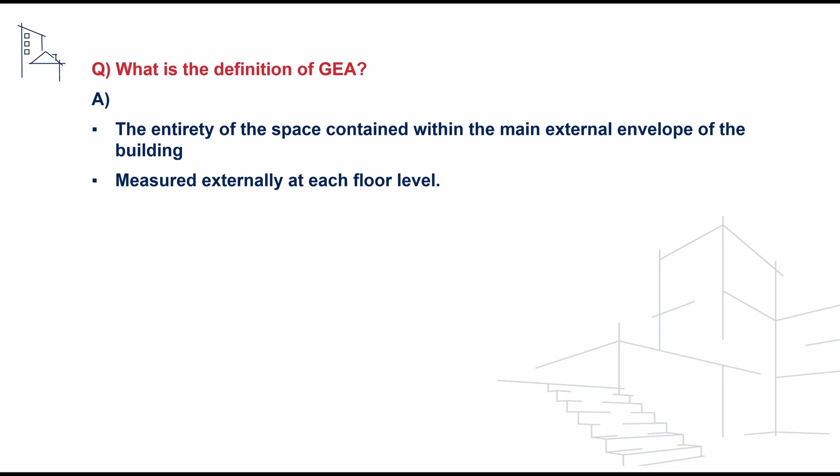To address this, we can say that this is the entirety of the space contained within the main external envelope of the building, and this is calculated using the measured external area at each floor level of the building.

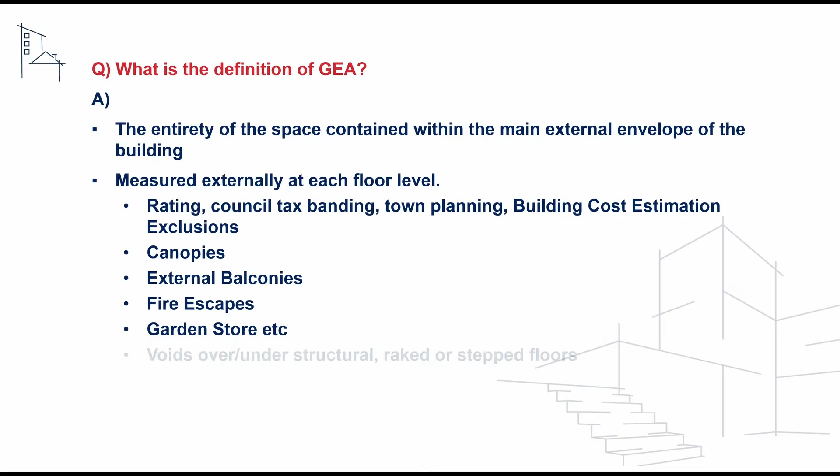It could include components such as canopies, external balconies, fire escapes, any garden stores, or any voids either over or under structural or stepped floors.

Another follow-on question we may receive in relation to this area is our understanding of the definition of net internal area. To address this, we can say that this is the usable space within a building measured to the face of the main external walls.

This would include areas such as atria with clear height above, measured at the base level only. It would include entrance halls, ramps of lightweight construction to false floors, any built-in cupboards or notional lift lobbies, and also any kitchen spaces.

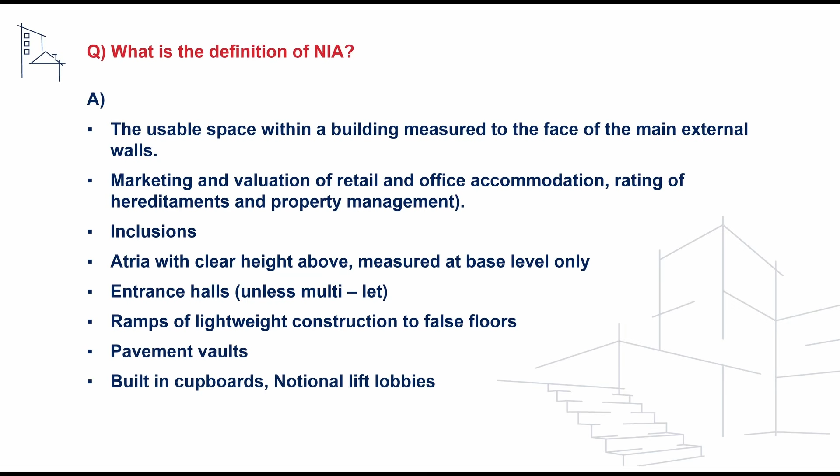The next question we'll take a look at is, what would you expect the percentage of net internal area to gross internal area to be?

To address this, we could say that this really depends on the type of project being undertaken, for example whether it's a school, hospital, or office.

We could say from our experience that if it were, for example, an office building, I would expect the net internal area to gross internal area to be in the region of 70 to 85%.

We could also say that 70% net internal area is not really considered to be very efficient, whereas 85% is considered to be an extremely efficient use of the space.

We may also receive a question on our understanding of measured surveys. To address this we can say that measured surveys involve taking measurements of sites or buildings in order to provide accurate drawings to scale.

They are usually specified to an agreed level of detail, to acceptable accuracy tolerances, scale, delivery times and costs.

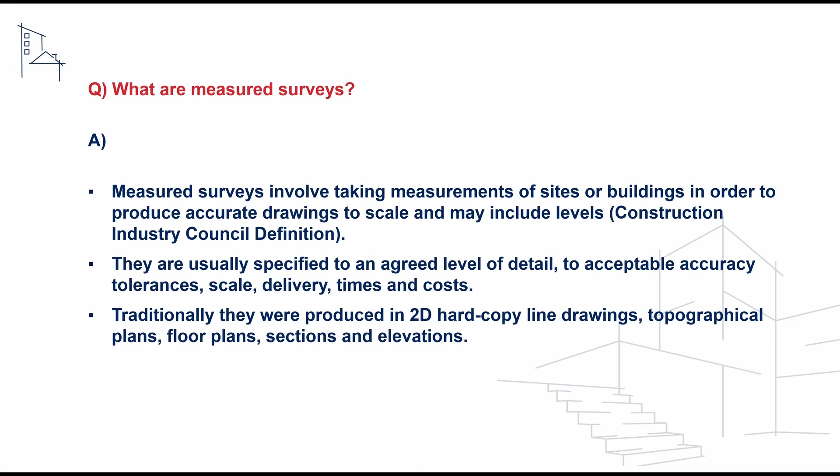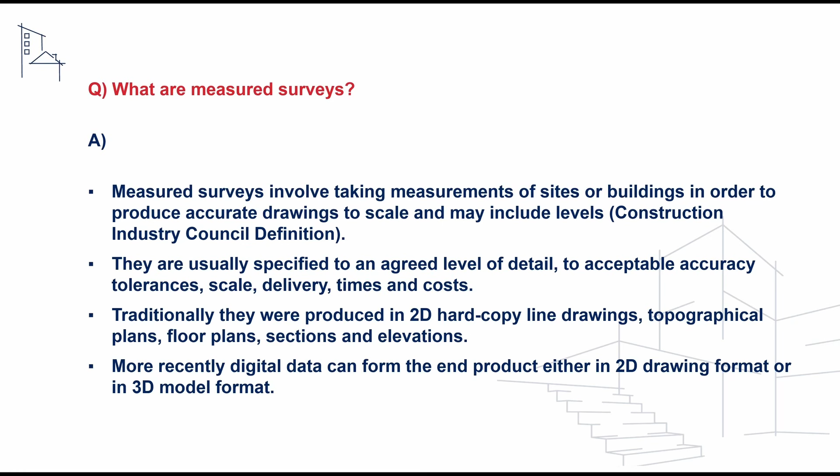Traditionally these were provided in 2D hard copy line drawing format with topographical plans, floor plans, sections and elevations, and more recently this has been provided in digital format where the end products can be provided either in 2D drawing format or in a 3D model format.

We may also receive a question on our understanding of building information modelling. To address this we can say that building information modelling is the holistic process of creating and managing information for a built asset, and this is based on an intelligent model and enabled by a cloud platform.

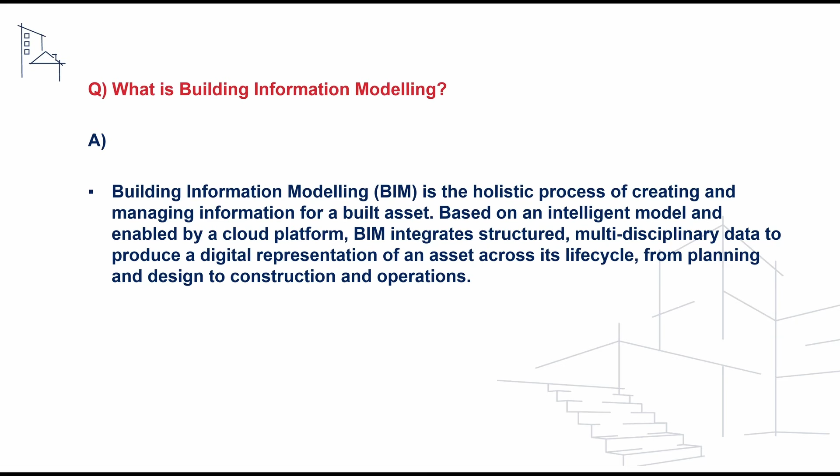BIM integrates structured, multidisciplinary data to produce a digital representation of the asset across its life cycle, from planning and design to construction and operation.